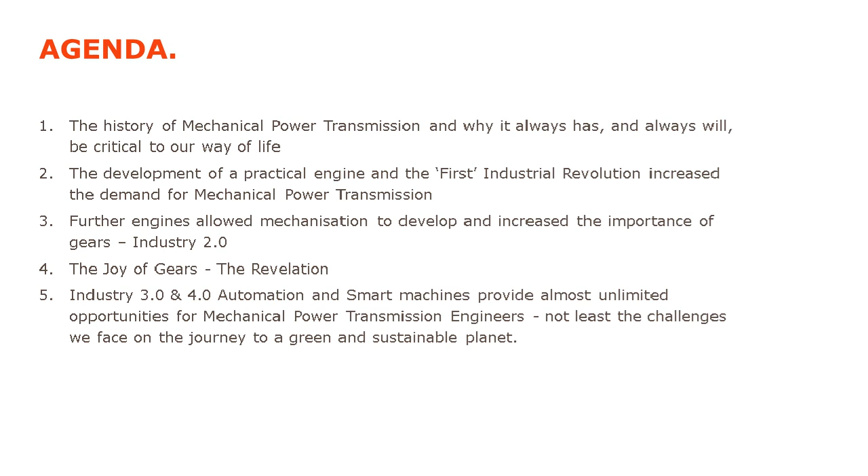And if you thought the challenges we've had over the last couple of 100 years were a lot, that's nothing to what we've got to do over the next few years. So, let's go on a little bit.

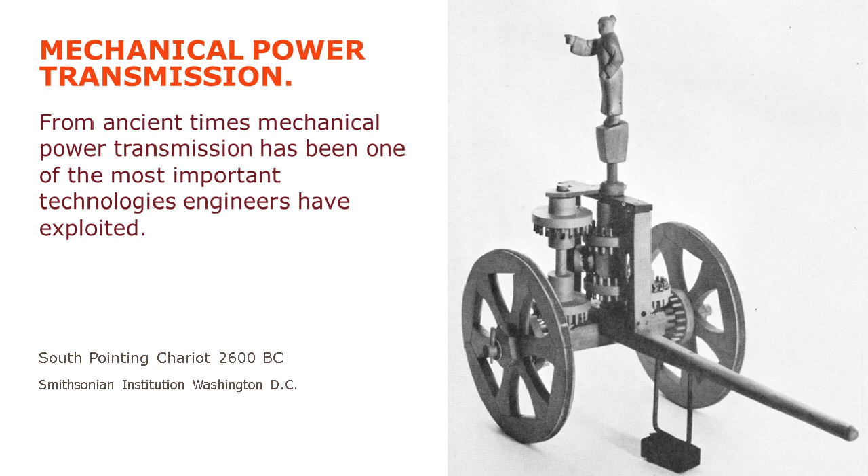From ancient times, I've dug in the history books, and we go down over 4,500 years ago, and we can see this south-pointing chariot, and in there you can see a selection of gears. There's actually a differential gearbox in there, developed in ancient China. And just to prove the point, we've been using mechanical power transmission for thousands of years, and it's been critical to what we do. Even if all you wanted to do is not get lost in the desert, and make sure you knew where north and south was.

Moving on, just over 2,000 years now, we have this navigation device. This is the Antikythera mechanism. It was a navigation device using a series of over 30 gears and plates to calculate lunar and solar calendars based on the movements of the sun and the moon, so you can navigate. This was about 82 BC, and it was salvaged from a ship that sank 65 BC. This is what people have been doing throughout history.

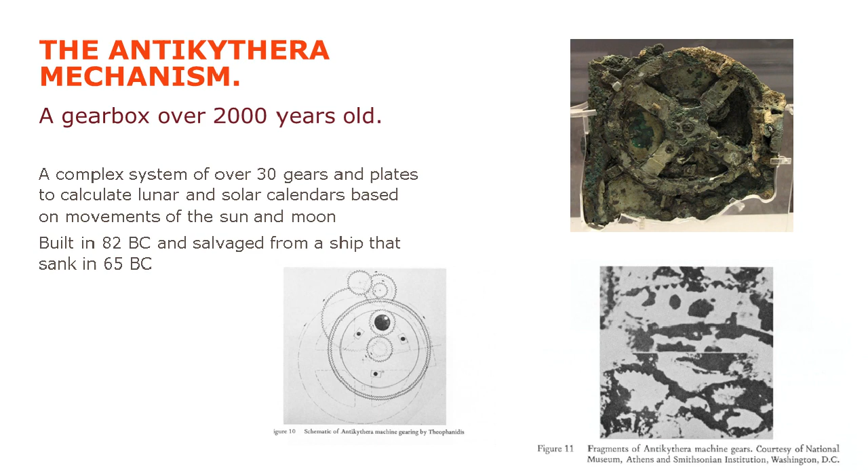Now, that is mechanical power transmission. It's more to do with motion control than really sending power, but it's just to show the point. Engineers and people have been using these almost as long as we've been civilized. However, what I want to look at now is machines where we're talking about transmitting power. So let's think about, first of all, machines powered by people.

This is the ancient Egyptian shaduf, a water lifting device. The prime mover is a man, and the driven machine is this water lifting bucket. The man is using mechanical power transmission to give mechanical advantage. The lever gives him the mechanical advantage, and it's also storing energy in that rock. As he pushes the bucket down into the water, he's storing energy as potential energy in the rock, and so when the water comes up, it lifts it up.

We say this is the Egyptian one because the Egyptians kept record of these things. I'm sure other civilizations were doing this too. But that is one of the machines where we're using mechanical power transmission. The motion, however, is discontinuous.

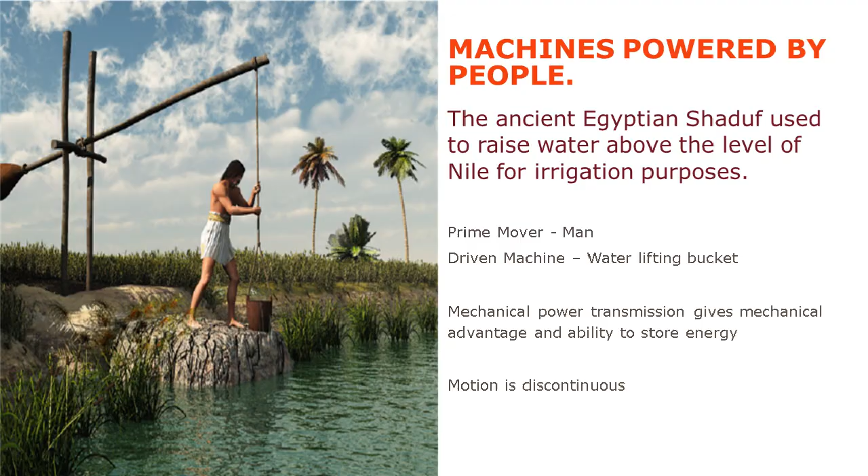So if we go to the next slide, we can look at machines powered by animals. This is quite ancient - a camel-driven Persian water wheel. It's a representation from history books, but I want to point out a few things. First, we have the driven machine at the back, which are water lifting buckets, and those are going at their ideal speed - not too fast so the water spills, but slow enough so as the buckets go through the water, they can be filled. It's going around with its center of axis horizontal, so the buckets go up and down.

But the driving machine, the prime mover, is a camel. It probably doesn't appreciate this, but it's also at its ideal conditions - walking round on a horizontal surface, going at a speed which isn't too strenuous, so its master can make it work all day, going horizontally around at the speed we want. And that mechanical power transmission is doing a few things: it's changing the direction of rotation, so instead of a vertical axis, it goes to a horizontal axis, which is what we want. Also, by those pegs and crude cogs, those primitive gears, it's giving the speed ratio we want.

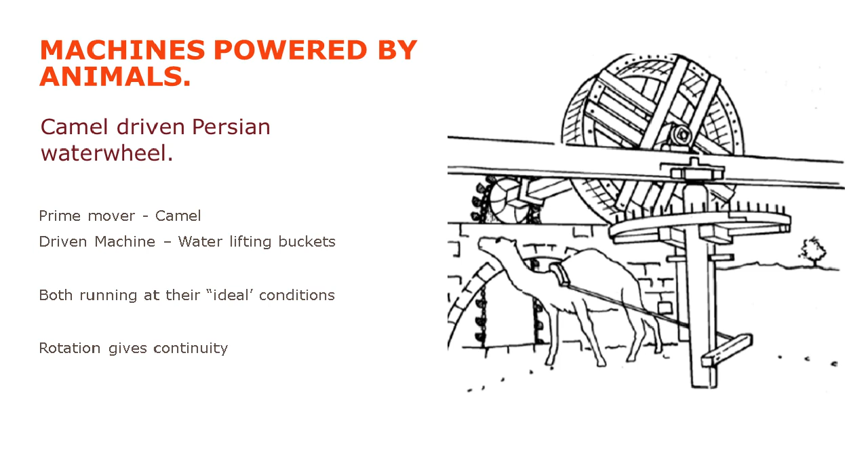And so that's a key thing we see as we go through history - mechanical power transmission and gears are letting things run at their ideal conditions. And one thing we take for granted: rotation gives continuity. Because we've got rotation, unlike the water lifting buckets going up and down, we get continuous motion, which is an advantage we often take for granted.

So not only did we use animals and people to do it, we used natural resources, what we call renewable energy now. So we had machines powered by wind, and in this case the prime mover is the blades going around, and the driven machine, which in this case is a windmill, is grinding wheels. Again, we're letting the prime mover blade run at its ideal conditions.

Inside that windmill tower, we've got a series of very crude gears which have been updated by that Preservation Society in West Sussex. But it's a series of gears transmitting power to allow the blade to go around at their speed, and we can turn the motion through 90 degrees so we can get the grinding wheels going at those speeds.

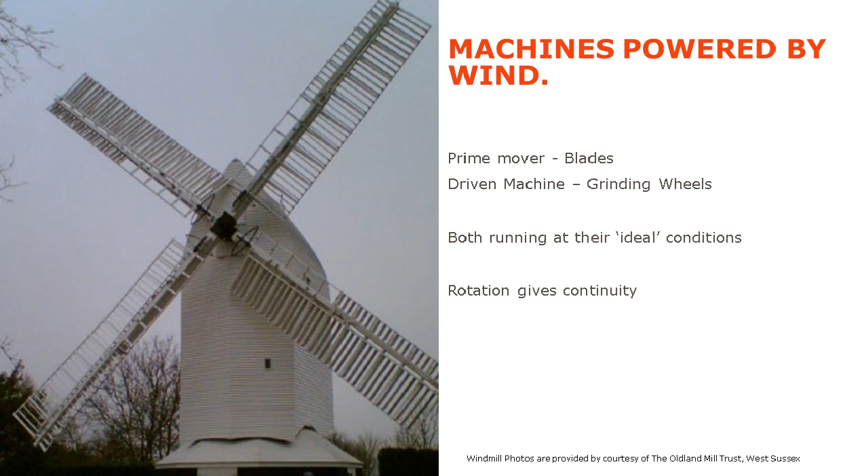In that case, we're grinding corn or grain, but we also use wind machines, I wouldn't say windmills, to raise water and move water out of areas. So again, we're getting useful machines, and the power transmission is letting things run at their ideal conditions.

We have machines powered by water, and again, we could have grain mills, water pumps, and here you can see water wheels where the water can come in at the bottom, the middle, or the top. It's the same message: the power transmission is letting things run at their ideal conditions and positions. If your mill pond is above you or the river's below you, we can play about with it so we can drive these machines ideally. So this is a quick history lesson.

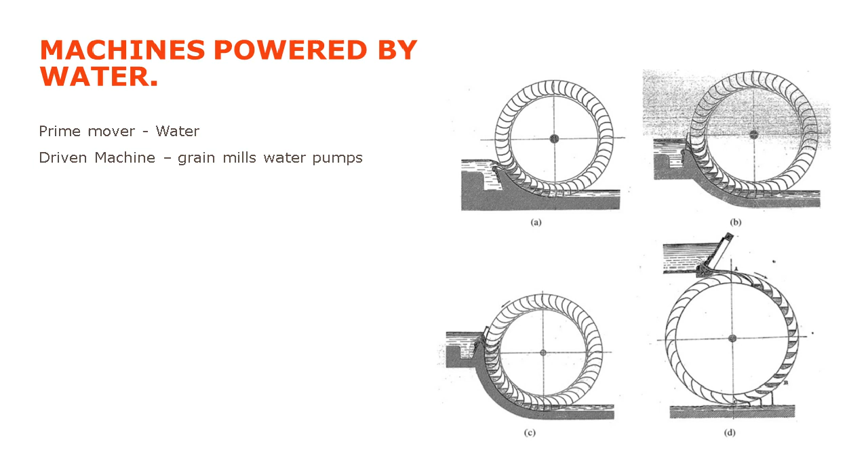However, one thing's important there: you had to wait for the wind to blow, or put your machines near where the rivers were, where you could make a mill pond or drive it. And that's not ideal. So man's always inventive, and so we make an engine. Now an engine, by definition, is just a machine used to convert some sort of energy into mechanical energy that can be used to perform useful work.

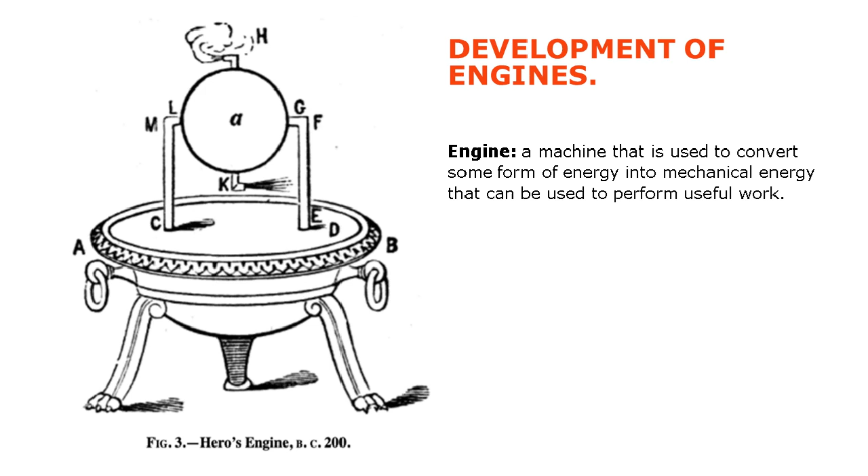But it wasn't until the late 18th century that we had the steam engine. This was the first practical industrial engine. This was developed, and this is a large engine. I'm using James Watt's steam engine here because James Watt was the man who coined the phrase, if you like. When we had the first practical industrial engine, we had to create a new word, and that was horsepower.

We needed a unit of measurement to rate the power of the machine we got, and it was adopted by James Watt to compare the output of his steam engines with the power of draft horses. It was later expanded to explain the power of all other sorts of engines, electric motors, steam turbines, internal combustion engines. There's a certain irony here because we've replaced the term horsepower with the word watt and kilowatts. So the man who invented horsepower, his word has been replaced by his own name, watt, kilowatts, watts, and sometimes megawatts, as we'll see later.

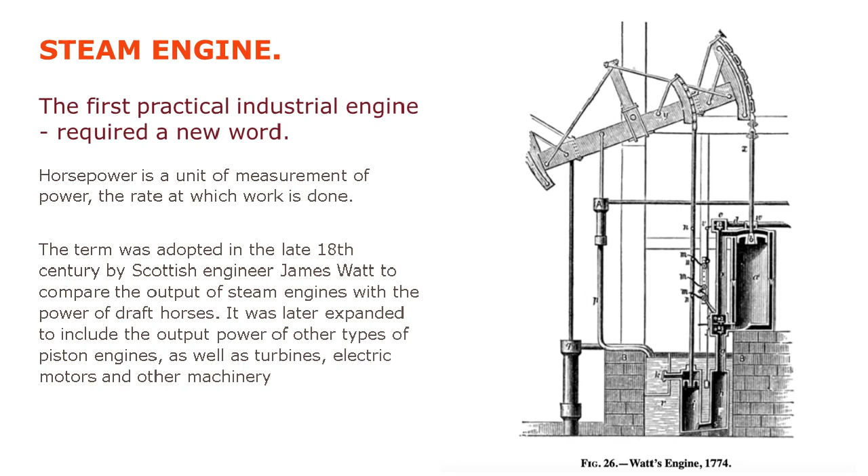So this heralded the Industrial Revolution, Industry 1, and let me emphasize this: that meant we had single machines for many users. We don't have time to go into how steam engines work, but it's a piston that goes up and down, and you can see here the lever. The first serious application was pumping engines.

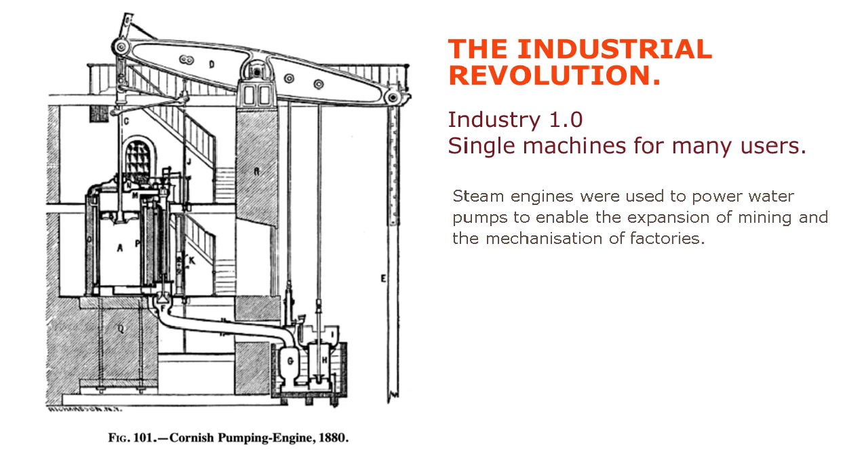In Cornwall, where they made the most initial developments of steam engines, they were used to get water out of the tin mines. The tin mines had gone under the sea to collect as much tin as they could, but they were limited by the mines flooding. So we used these engines to pump the water away so we could carry on mining. We call it Industry 1 because it was single machines for many users, so you had one big machine and so many people could work.

And this gave us the mechanization of factories.

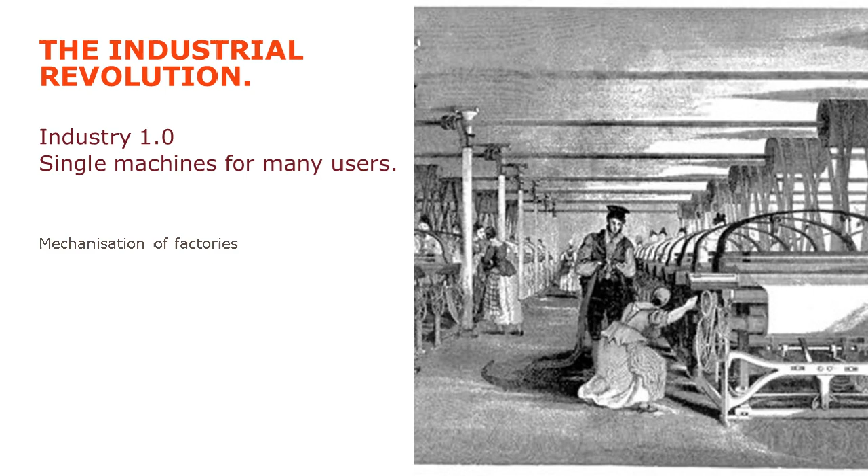So here we are, and you can see here mechanical power transmission. I haven't shown so many gears here, but it is mechanical power transmission. It's letting the prime mover run at its ideal conditions, and those individual little machines all running at their ideal conditions too. So we get mechanization of factories, and that's what's happening.

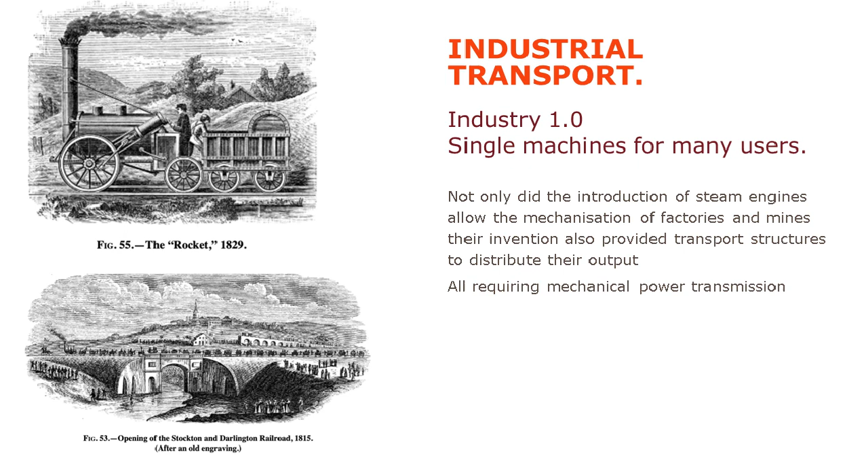It was a massive change, Industry 1, single machines for many users, and it did start to transform our way of life. Whether that was good or bad, it certainly transformed it. If we think about those cotton factories, instead of people working out in the field, they were drawn into the towns so they could work in factories. It may not have been ideal, but it was a much more reliable source of income than what they were getting before. This whole way of life, which changed towards the end of the 18th century, exploited and used mechanical power transmission to get there.

And this really did change things. So we had the smaller prime movers, meaning we could have many machines for many users. Everybody was getting them, factories were using them, things were going on like that. And again, every one of those prime movers pretty much needed mechanical power transmission, gears and gearboxes.

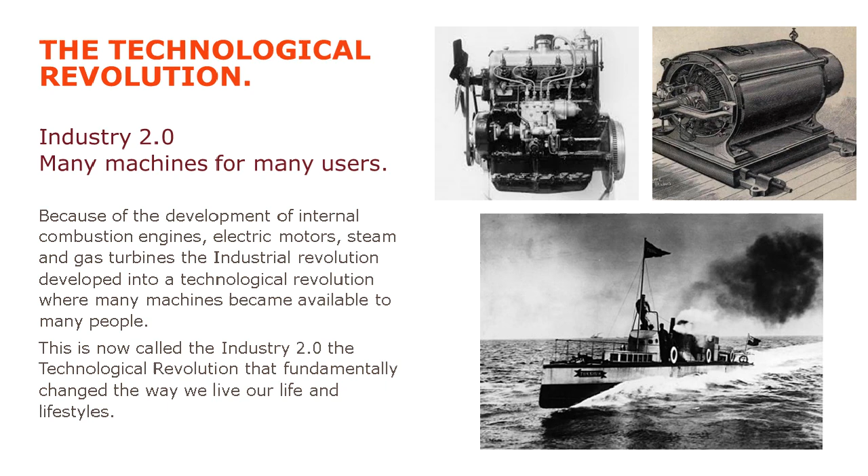This technological revolution led to what we call mass production, towards the start of the 20th century. I make no excuses — I know Mr. Ford didn't invent the car or the internal combustion engine or the first car. But the point is, here we had mass production.

He introduced the Model T, and then he introduced integrated moving assembly lines for auto production. So not only did his products use many machines for many users, we were using machines to produce them. A few things we often don't understand: what Henry Ford did not only produced cars so rapidly and reduced the actual cost of the product, but it also gave a step change to the wages of production workers, enabling them to buy not just motor cars, but the resulting products more broadly.

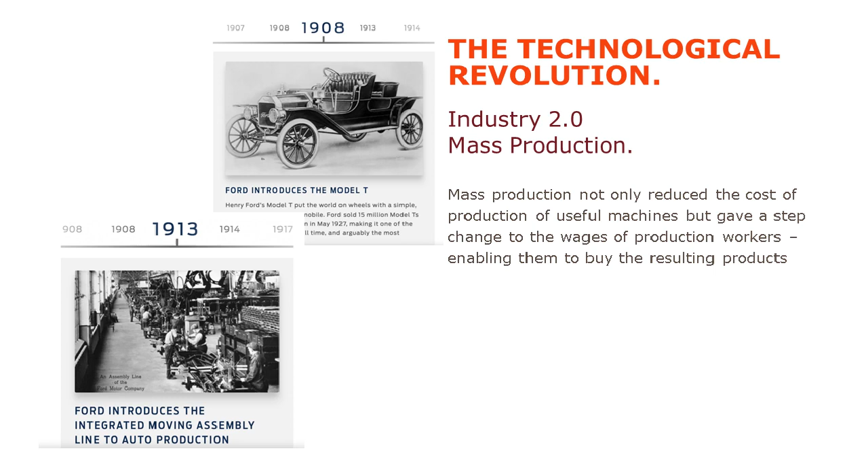This mass production changed the way of life again, because you would never have believed that by the end of the 20th century, within 50 years, almost everybody could have their own personal transport or whatever. All these things in our way of life came about, and each of these machines we were using was demanding mechanical power transmission.

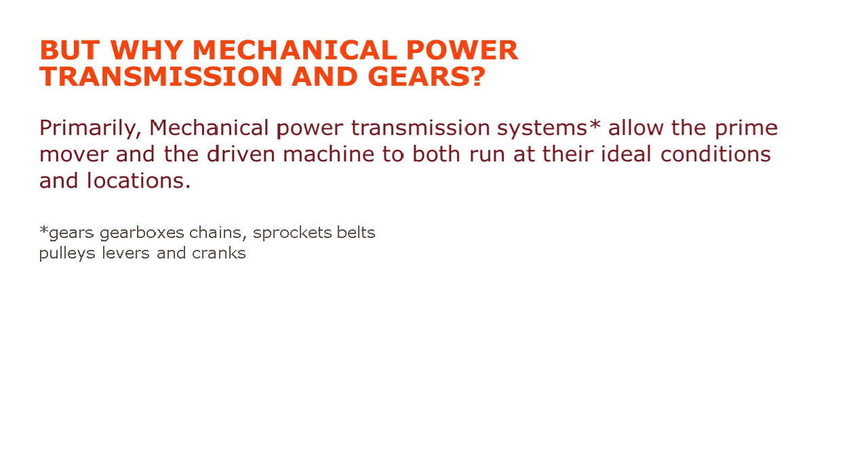But why mechanical power transmission and gears? Well, primarily, mechanical power transmission systems allow the prime movers and driven machines to both run at their ideal conditions and location. When I talk about mechanical power transmission, I talk about gears, gearboxes, chains, sprockets, belts, pulleys, levers, and cranks. All these things we've seen in those examples, allowing these things to work ideally at their conditions. So that's why we use mechanical power transmission.

But what about gears? Well, there's a few things about gears which separate them. There's a table here of all those different things I mentioned. That actual table is from one of the BGA teaching packs. We can talk about that much more if you attend the Gears and Gearbox course that's coming up.

But we can see there we have spur helical gears, bevel gears, worm gears, and all those things going there, flat belts, V-belts. And the thing is that whilst gears aren't the fastest of mechanical power transmission, that accolade goes to flat belts, which you can run at 150,000 revs per minute. But equally, we can run spur helical gears up to 100,000 revs per minute, and that is an incredibly fast machine, if you've ever seen a machine that runs anywhere near those speeds.

But look at the power density you can get from gears. It's incredibly high. And then the efficiencies, again, it's incredibly good, 96, 99 percent. That's not untypical. Even worm gears, which over the latest years we're getting to be a lot more efficient than they ever were, are incredibly efficient ways of doing these things.

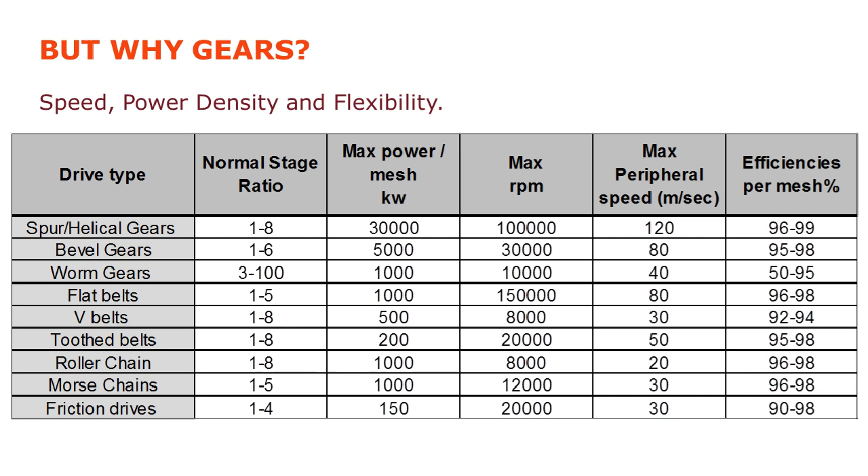So all those things exist, but gears give you not only the high speeds and power density, but one thing we often take for granted is flexibility. While spur and helical gears run on parallel axes, and belts, V-belts, tooth belts, and roller chains all have to have parallel axes, that's not so with gears.

If we look at the next slide, we can see crossed axis gears, worm gears, bevel, spiral bevel gears, and even hypoid gears. The truth is we can change the axis of power any which way we want. Even that camel-driven pump was doing this over 2,000 years ago. But we can change that.

And this allowed those small prime movers to get the ideal mechanical power transmission and develop all these things we're looking for.

Before I go on, I just want to talk about horsepower. We take these things for granted. So this is a 1 horsepower machine. Absolutely, we understand that. But that was never enough to do the things we wanted to do.

So here we can see a 30 horsepower machine. And I'm not convinced every one of those 30 horses is pulling their weight or doing all those things there. But these were developed in the 19th century, so we could feed the growing number of people. That's a 30 horsepower machine, from the USA, where they had these very large machines and very large prairies of wheat where they could use it.

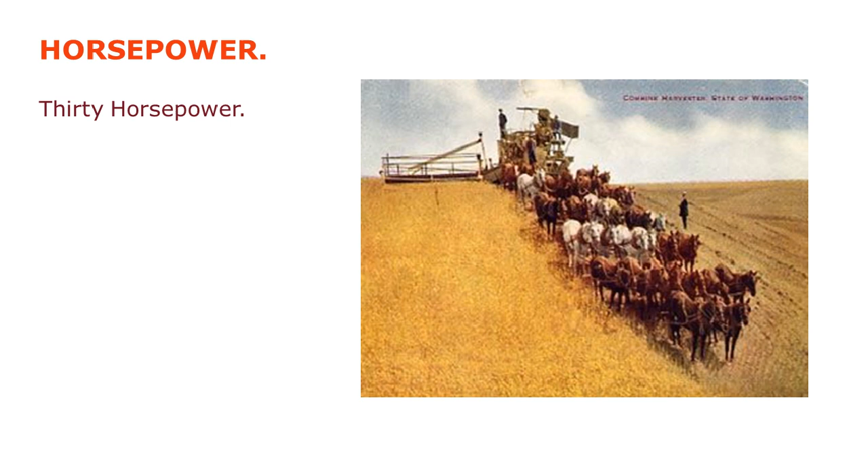Then it has a gearbox in there, which gives you different ratios. Then it has a differential gearbox. Not only is that changing the axis of power through 90 degrees, it's also allowing those driven wheels to go at different speed when the vehicle goes around a corner. In addition to that, we have gears and gearboxes in there, allowing power takeoffs to drive things.

So whether you like it or not, that tractor is doing all of the work those 30 horses can do, probably more efficiently in the transfer of energy into the work done, and one man can do it. One man can drive that tractor and do what was being done there by 30 horses. And you can see just by thinking about that, what a massive change in how we manage to feed people.

And there's a concept here, which I'm not sure if the figures are absolutely right, but the concept is that at the beginning of the 20th century, we had 1 billion people on the planet, and at the end of it we had 5 billion people, and we were farming perhaps not as much land, because 5 billion people take up a lot of land.

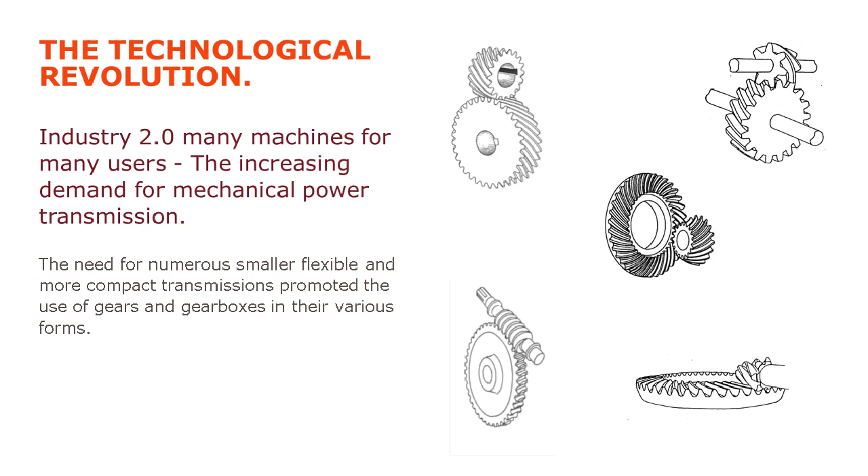So we'll look at personal transport. And again, I'll go through these - there's a lot of slides to get through. But we look at personal transport - everybody has access to some sort of car. So look at that sports car there.

Just let me explain, take that what I've just started a little further. There's an internal combustion engine there, and again, that's an Aston Martin car - not particularly a David Brown one. But that has a 300 horsepower engine in there. And that's quite staggering. The problem with that, it develops its power at 9,000 RPM, which is much too fast to drive those wheels. If you drove those wheels at 9,000 RPM and exploited the 300 horsepower, that car would have to go 400 miles an hour. And then even an Aston Martin doesn't go that fast.

So the point is this: what you need to do is reduce that speed to something useful, and that's indeed what you do with a gearbox. And I mentioned before, in order to go around a corner, those driven wheels at the back need to go at different speeds and still deliver torque. So you use a differential gearbox in there. And we actually saw one on that south pointing chariot, but this was developed with cars to allow you to do those things. So you can exploit the power of that internal combustion engine and drive that car at fast speeds.

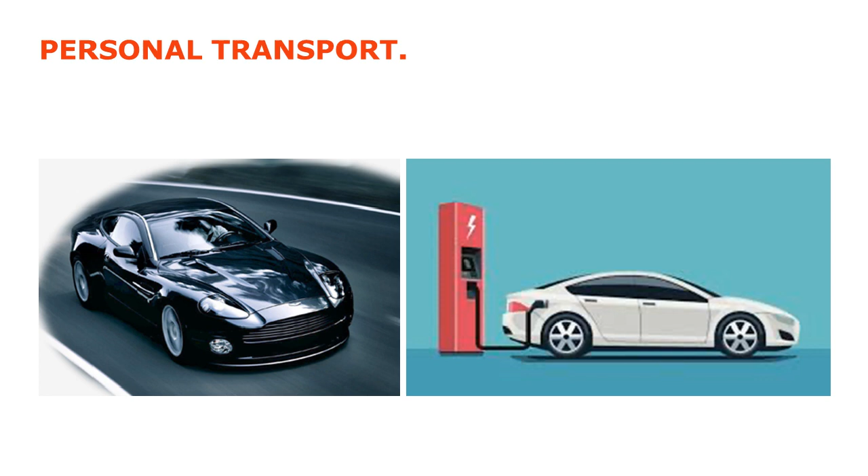You do not need, because of its torque characteristics, to keep changing the ratio all the time, but you do need to have that gearbox to run it there. But I have to say, talking to experts in the industry, the next generation of electric cars are indeed having a multiple ratio gearbox in there, even if it's only 2 ratios, just to make them more efficient and able. And we go through all these little things here. I won't labour too long on this, but every part of our life today is driven by machines, gears and gearboxes.

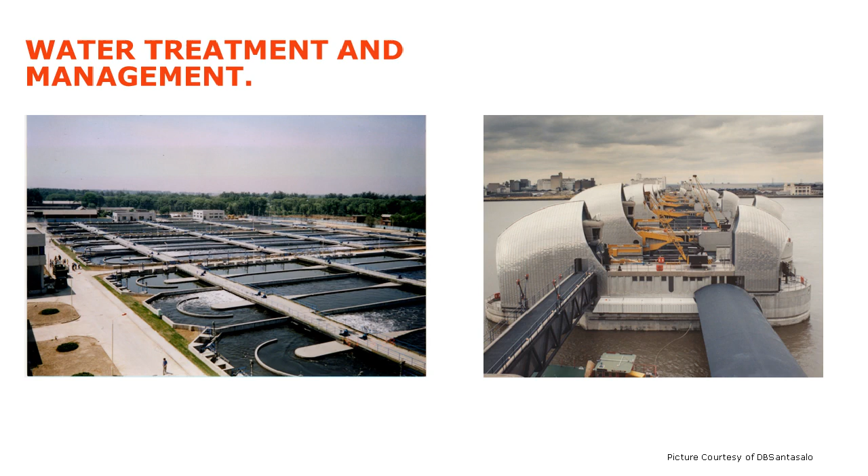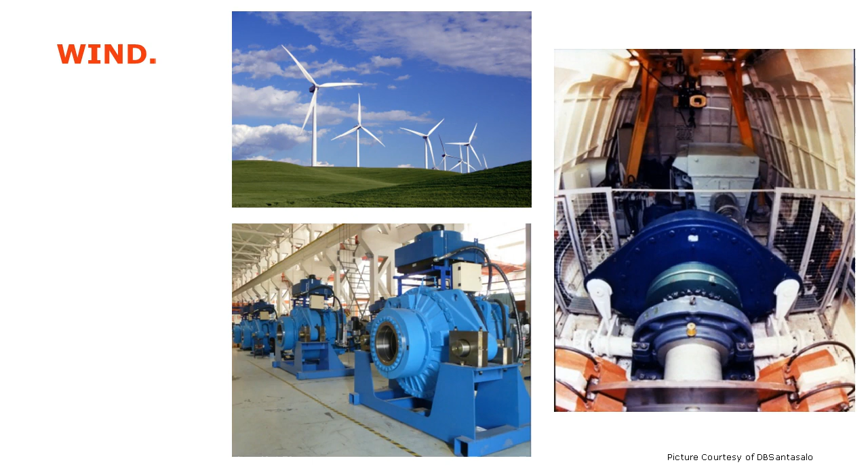We're transporting goods there, water treatment and management, all of those things, whether the Thames barrier or whether it's water treatment plants, there's machines in there doing it. Steelworks, all these activities require gears and gearboxes. Wind power, we'll talk about that in a few minutes. Wind generation, over 90% of the wind turbines you see have a gearbox in there, allowing that alternator to run ideally and the blades to sweep at the right speed.

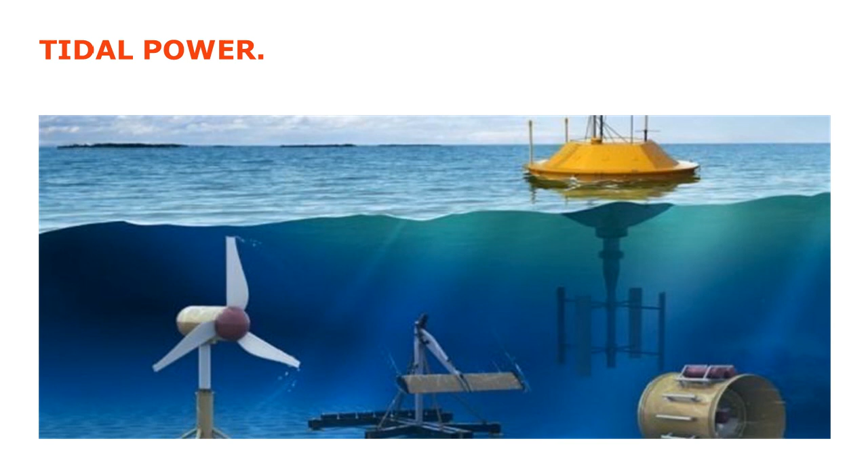Obviously, go into tidal power. Those are machines which are being developed, and each of those will have mechanical power transmission and gears. So we're using them all the time.

So now I come to the revelation, and this is where we are. The inescapable truth, and this is from somebody who actually has spent his whole career on gears, is that they're used not because anybody wants them, but because we need them. The thing I spent my life on, nobody really wants them. They're only there because we need them. And there is a secret joy there. I'll explain that in a second.

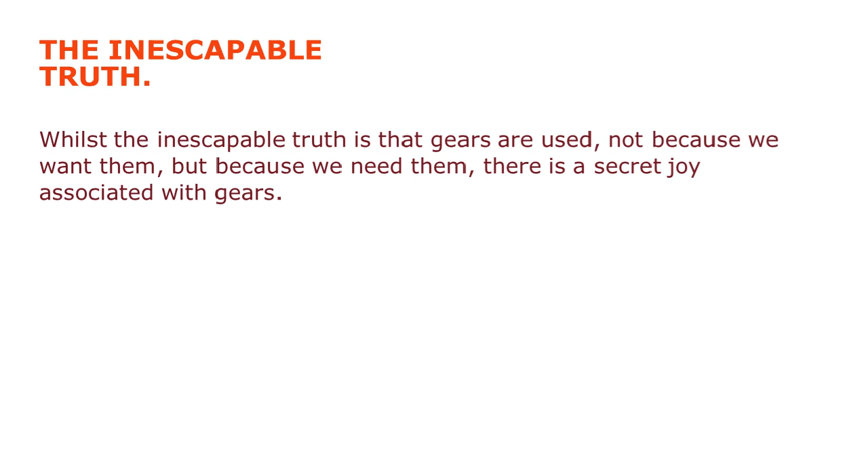But what I'm saying here is that actually if I had a gearbox, it's no use on its own. It does nothing. It needs a prime mover. It needs a driven machine. And that is a secret joy. And that is what it's.

This is the revelation. To fully understand and appreciate gears, one of the simplest, oldest, and perhaps most elegant and precise of all mechanical components, it is necessary to grasp a vast range of engineering topics. And that is where I found the joy, and what I believe the joy is. Because they embrace so many technologies, there's always an opportunity to learn something new. That's what I've been doing for 50 years, and it's inevitable that once involved, you will meet and enjoy working with many different and helpful engineering experts.

So now, what I want to do is go through where that joy is. So we'll quickly go through these things. First of all, you need to understand the machines we use. These are the most simple ones. So for every machine we use, every driven machine, we'll find there's a torque speed curve. And so the one on the top right there, everybody knows it's a fan curve. So the torque on a fan varies with the square of speed.

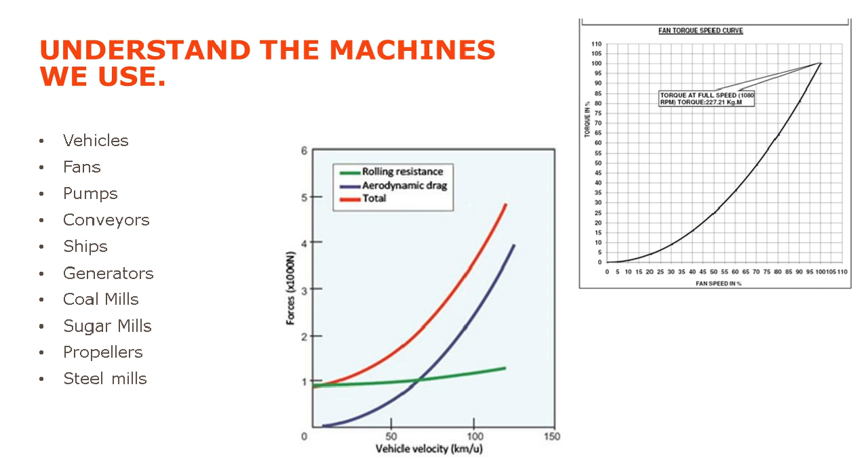On the left there, we have a vehicle. And so what we have is a rolling resistance, a green line. And then you have aerodynamic drag, which goes up pretty much exponentially, or with the square of speed. And so the red line is what you need to drive a car or a vehicle to go faster and faster. If you're going to be involved with gears, you need to start understanding all these things here.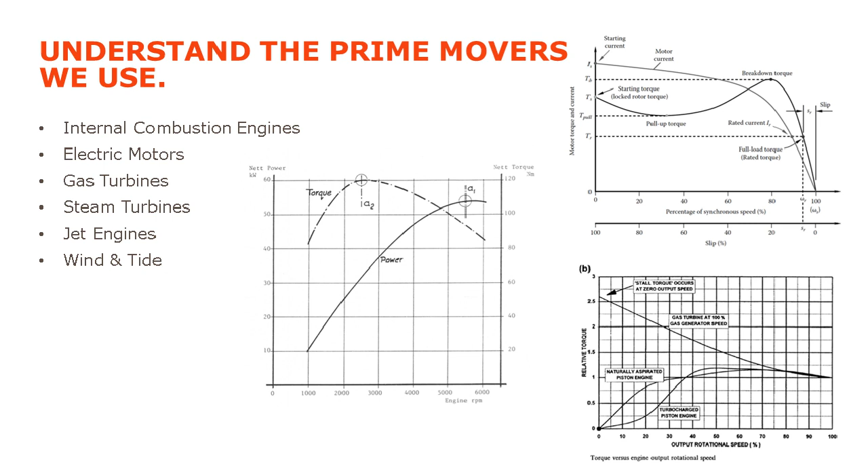So, let me go back again, sorry. We need to understand the system design.

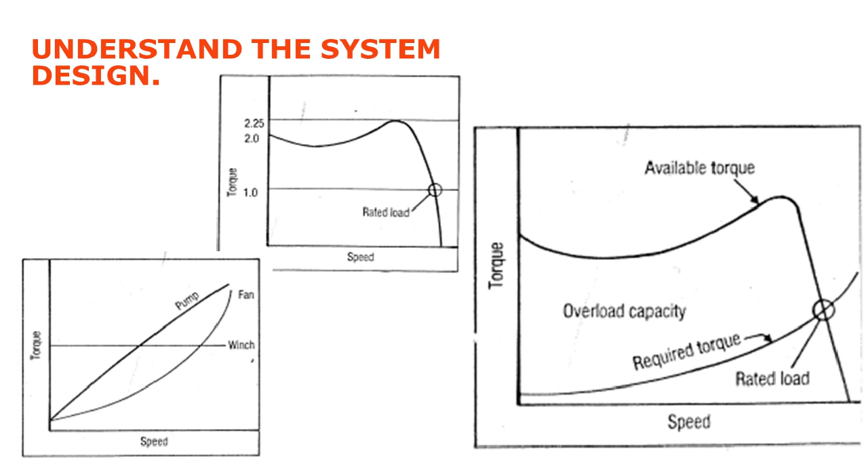Somebody has to put these systems together and understand this. What I mean is that, yes, you could put a fluid coupling in there. You can buy a very smart motor, and you can put in some limited slip clutches, or whatever. You get some smart motors to control that. But somebody has to make that decision. Somebody has to understand the system design and put all the things together.

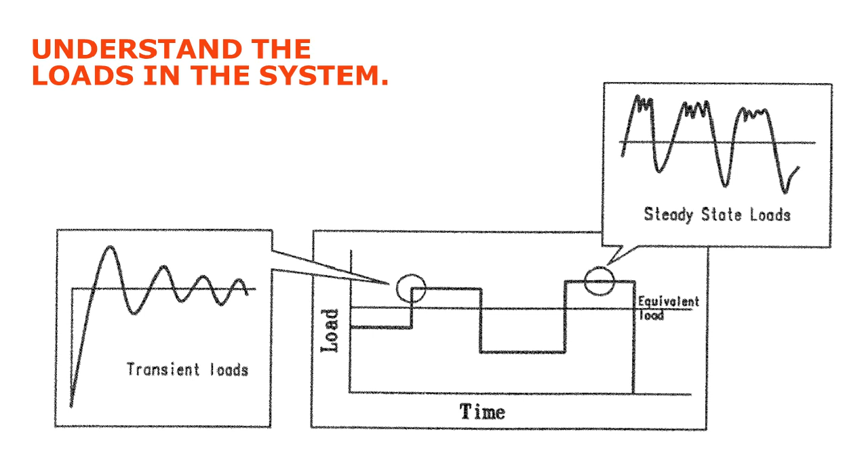So we've done all those things, but then I need to understand a bit better the loads in the system, and that's what I've got here - a diagram showing the loads going up and down. As you know, loads are never steady, and when you go from one state to another, you get transient loads, and you need to understand those. Every system, the load is never steady. You need to understand these things if you're going to have a successful system with a gearbox.

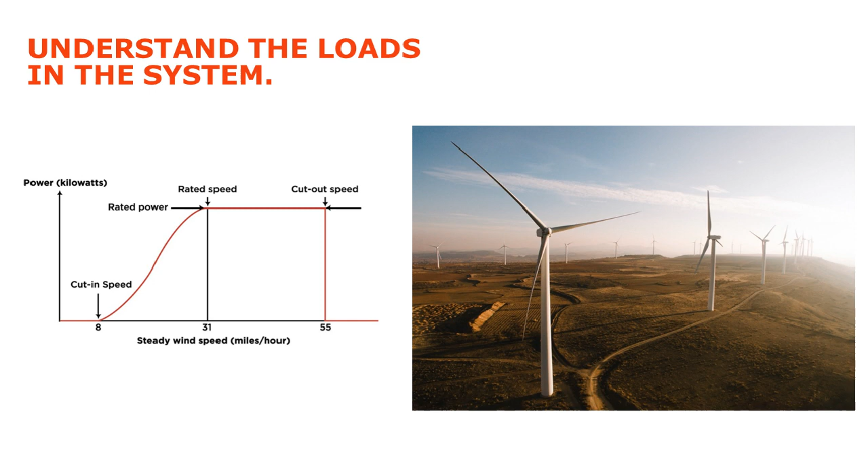Blades were falling off wind turbines. It is one of the most arduous applications people had come across, and nobody expected it. We had massive amounts of failures, both for wind turbines and all of the transmission systems were suffering loads nobody understood. So what we had to do is go and understand it.

Yes, you've all done this at college - you write the equations of motion, and you solve these differential equations of motion, and you can predict what the loads are. So all that time you spent in maths learning about Laplace transforms, yes, it's really useful - you need to understand the system. I was very lucky, one of our engineers, Ian Pate, could remember how to do these things, and Ian managed to do this, and we quite suddenly found out there were a lot of things going on in that system.

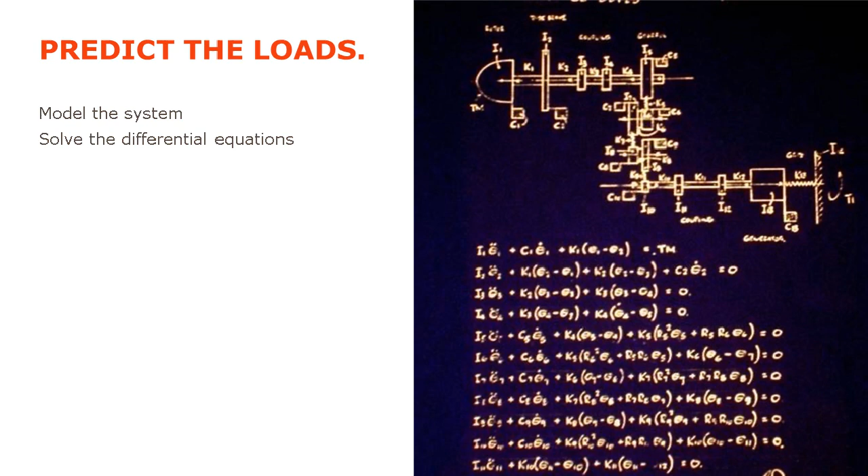What was happening is we were getting typically up to 450, 500 kilowatts going through the system. The biggest shock in the system was there as you brought it up to speed.

Yes, this is Altamont Pass in California, 60 hertz. That's the national grid in America, and the machine's running at 60 hertz. However, if you weren't absolutely in phase with the grid, you'd be a couple of milliseconds late, because of the stiffness of that last part of the diagram. It would grab you, and whatever loads were necessary, it would bring you into phase.

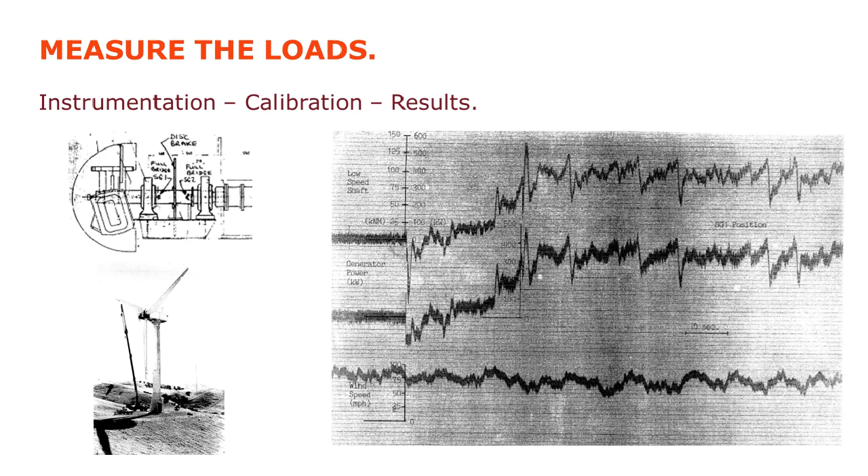That's what people learned, and that's what caused a lot of failure. So understanding the system, sometimes you need problems to fully understand these things. But over the years with wind turbines, we've learned a lot. It's been 40 years since that started happening, and now things are pretty reliable, though it's still a very arduous application.

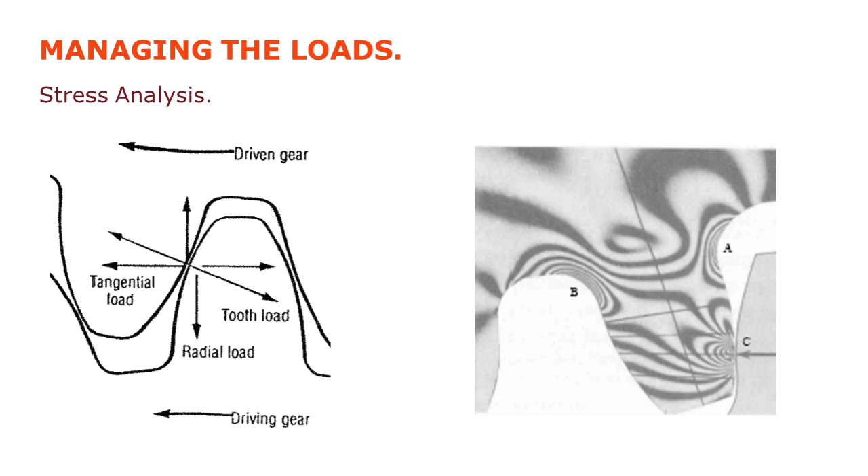Once you know the loads, you've got to manage them. Looking at the gear teeth, we can see the Hertzian stresses there, we can see the bending stresses, and we need to do the stress analysis.

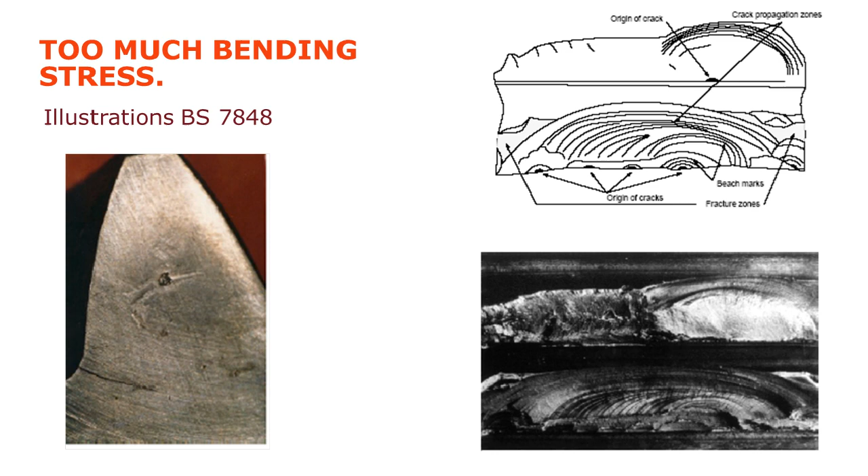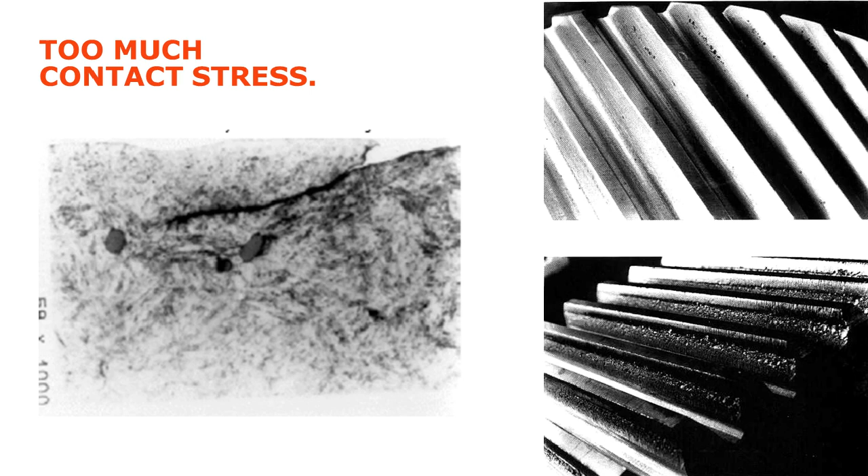All this metallurgy you've learned, you can look at all these things, and all those illustrations are from the British Standard on identifying failures. We can see pictures of bending and whatever. Too much contact stress, the Hertzian stresses come at the root of the teeth, just below the surface. The cracks propagate from just below the surface, so we get surface pits.

We need to calculate, we need to embrace the standards and calculate the load capacity of spur and helical gears, and that's what people are doing all of the time. Today you have little or no discretion. You need to follow the standards to make sure you get certification for the products you use, and these have been developed over the years.

This is where engineers have to come make the decision. The basic principle in all of these gear rating standards is to start at the top, where you work at a nominal tooth root stress, sigma F naught. The detail of this we can go into in the gears and gearbox course, but the concept I want you to understand here is you don't just sit at your desk and say, that's the nominal root stress, that's what it's going to feel.

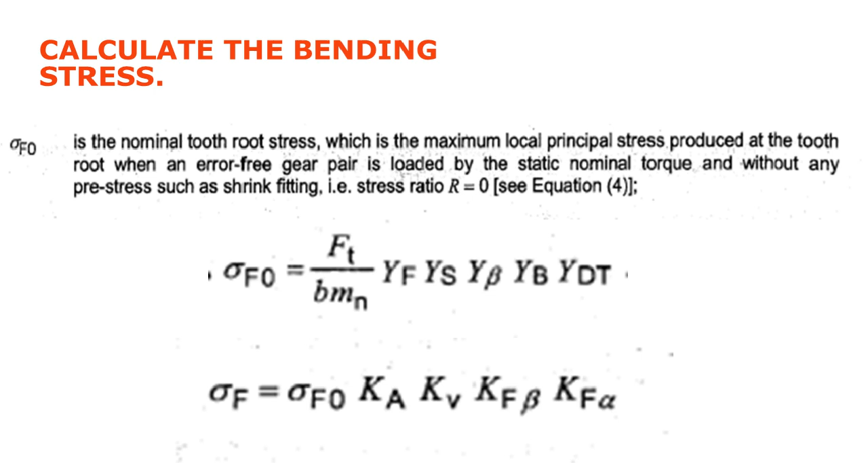You have to make a decision on how it's going to be manufactured, how it's going to be installed, and how it's going to be maintained. You need to go and discuss with your manufacturing people what accuracy they can get. You need to know what application factors are there. So the engineer isn't just sitting there giving a theoretical thing. He needs to go and understand, and then he will modify that nominal stress to give you the actual stresses, taking account of the accuracy of manufacture, the application factors like we saw in that wind turbine. Then you make an engineering decision to say, that's my theoretical thing, that's what I think is pretty certain to happen, so those are the stresses we have to accommodate.

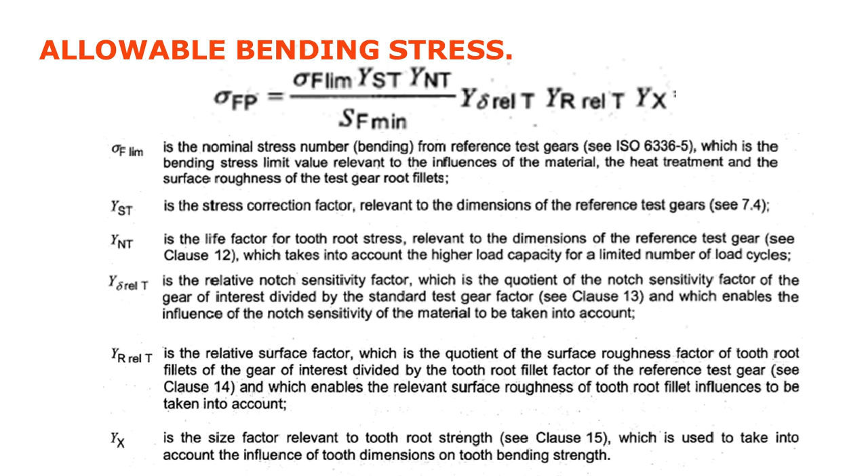So again, I'll go through that. There's allowable bending stress, all of that Goodman diagram, all that fatigue data, because pretty quickly with gears you get up to infinite life, you soon do a million cycles, and so you have to understand all that thing you learned about strength of materials.

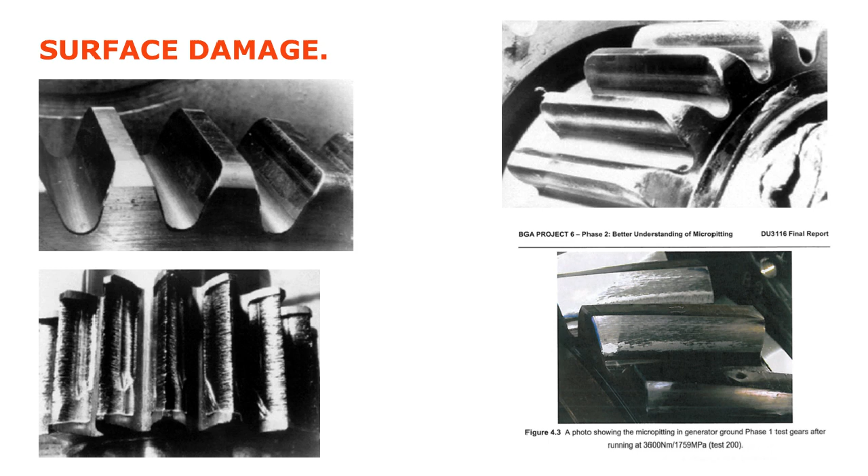And again, you can get surface damage. Gear teeth are always a mixture of rolling and sliding, so you have to depend on lubrication to handle that. And there's more and more standards.

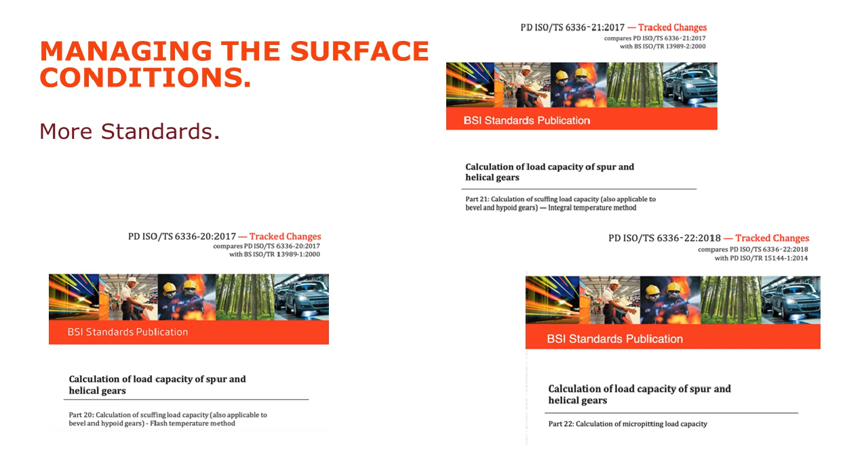I'll make the point about standards. This is ISO 6336, and you can see that we're now up to part 22 - there's 22 sections to that. If you're young and involved, if you're not happy with the standards, please get involved with the UK's standards committees so you can attend ISO meetings and put your two pennies in to say, this is how I think the standard should be, this is how we need to improve things. There's opportunities there to do it.

Tribology and lubrication - we need to separate the surfaces. So you need to understand about hydrodynamic oil films, elastohydrodynamic, mixed film, all these things. You need to understand this. Now we can calculate oil films pretty accurately, and we rely very much on the oil companies to deliver and give us the additives and lubricants which allow us to make gears run at incredibly high speeds and loads that we wouldn't have thought were possible 50, 60 years ago.

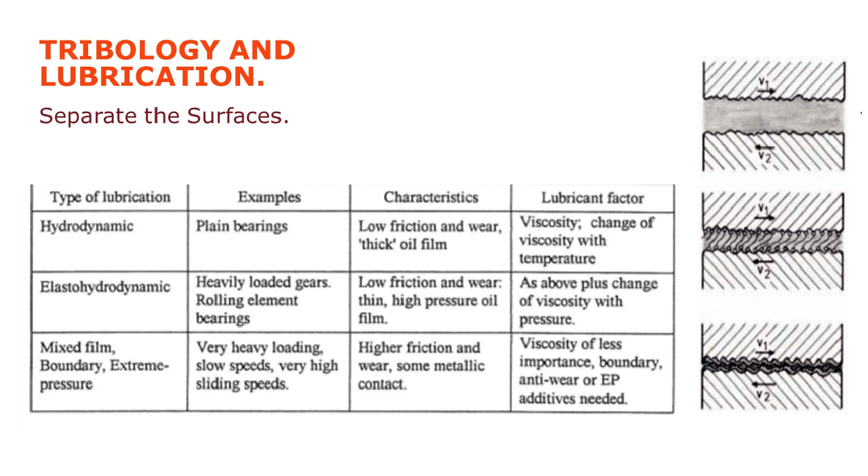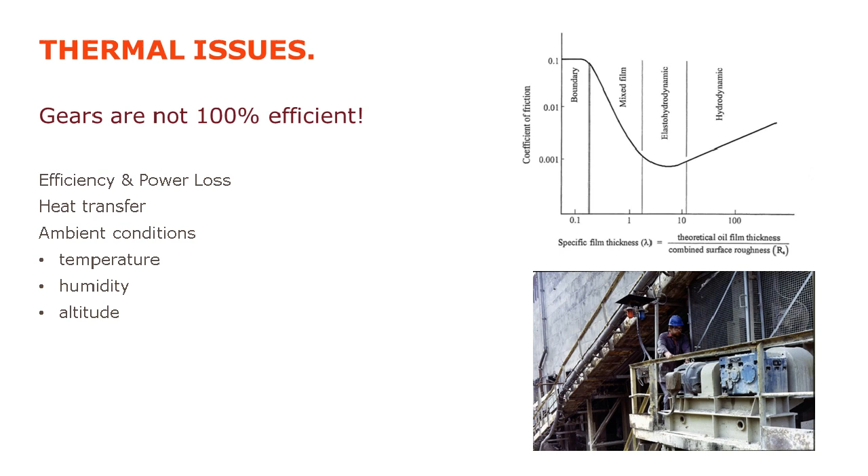Thermal issues are important. There's always a power loss, even though we know there's 99% efficiency in these things. There's still a lot of heat to get rid of, and we need to look at how the coefficient of friction changes with different lubrication, and how we're going to get rid of the heat. Yes, bending moment diagrams, shear deflections are important. We need to know how things change.

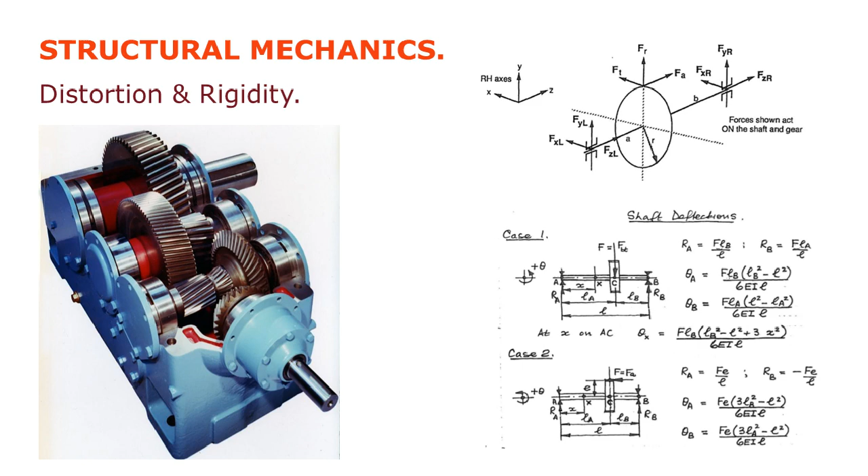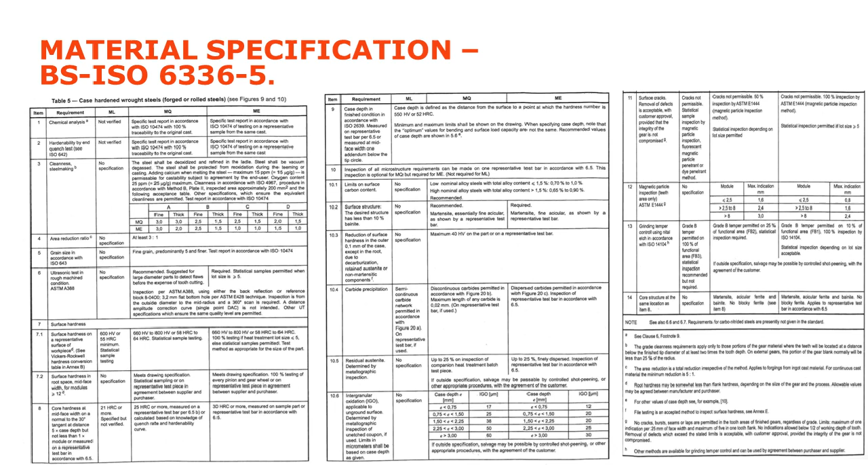Material specifications - we're very lucky. Now the materials we get are incredibly strong, but you need to embrace the metallurgies. This is from 6336. In order to get a gear material which will do what you want it to do, you have to get certification, and there's 14 parameters you have to certify and prove before you can get a piece of material. Luckily, we have some wonderful material suppliers now who can supply material with the appropriate certificates to do this.

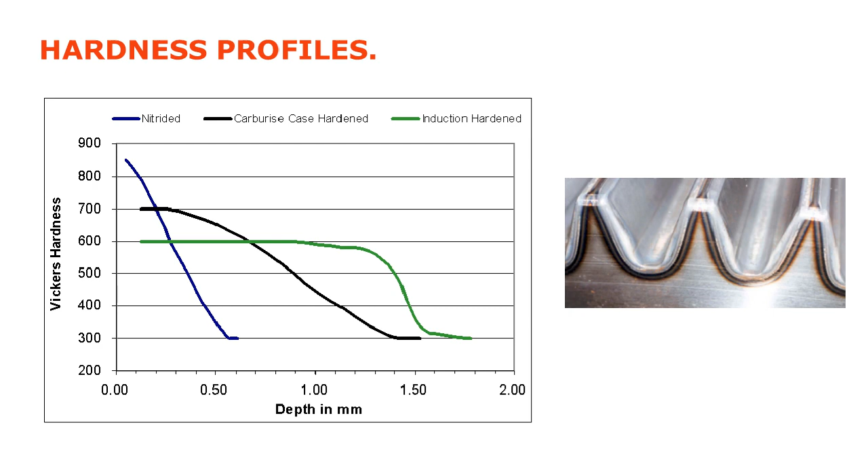You need to harden the gears to get the thing there, so heat treatment is very important. We can nitride gears, we can carburize and case harden, induction harden them, give us the surface hardness we want. Metallurgy is incredibly critical to what we do. Material science - I hate to say this, but metallurgy and treatment are critical to the performance of gears. So those metallurgists you work for - every successful gear company must have successful metallurgists and heat treatment facilities, because we rely entirely on it. All that you learn about material science, once you start visiting a heat treatment plant, you'll fully appreciate metallurgy much more than any classroom will do.

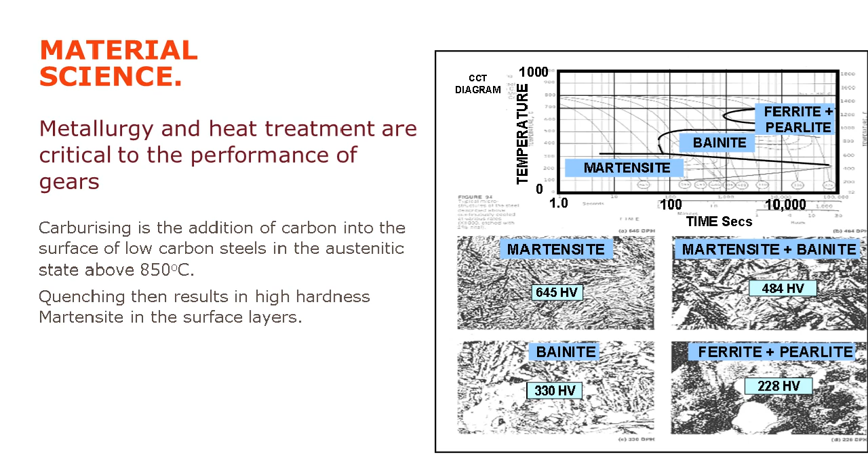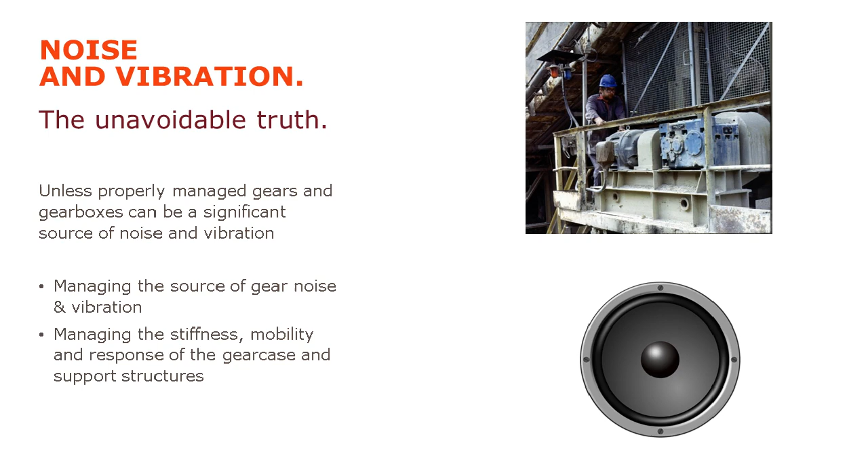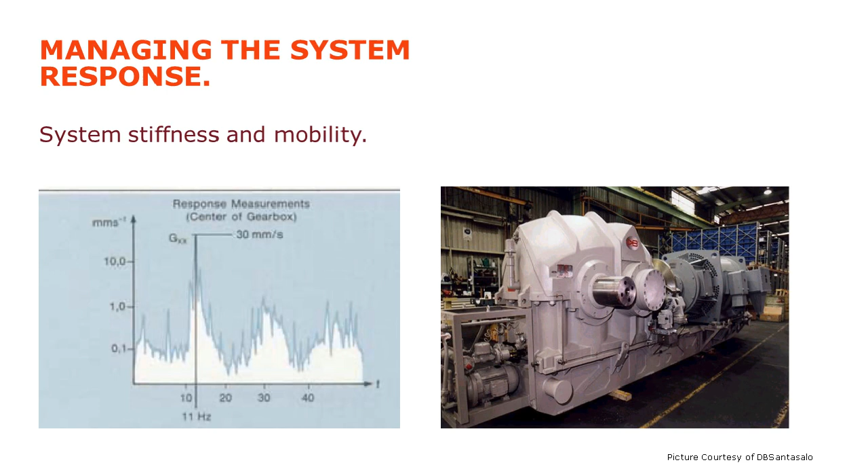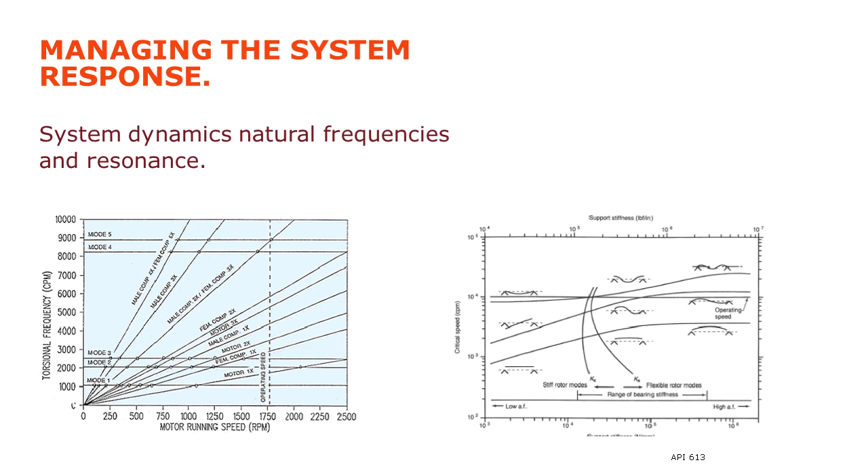I am going through these quite quickly, so we have a little time left for questions.

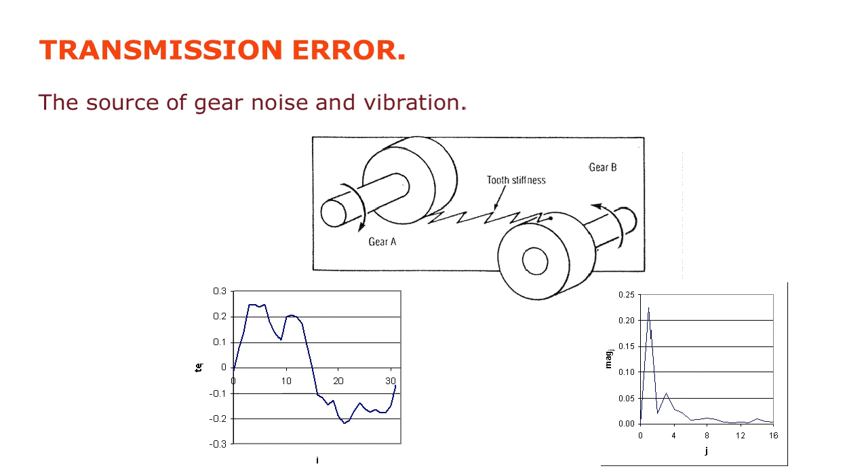Transmission error is a measure of the source of gear noise. We model gears, we put in a tooth stiffness, and transmission error is how much that representative spring connecting two bodies moves during the transmission. If that's zero, you get no noise. But these days, we have to predict how the stiffness changes as different gears go into mesh. That was a massive mathematical challenge for many years, and now we have software which helps. But in order to make silent or very quiet gears, you have to do that calculation and embrace it.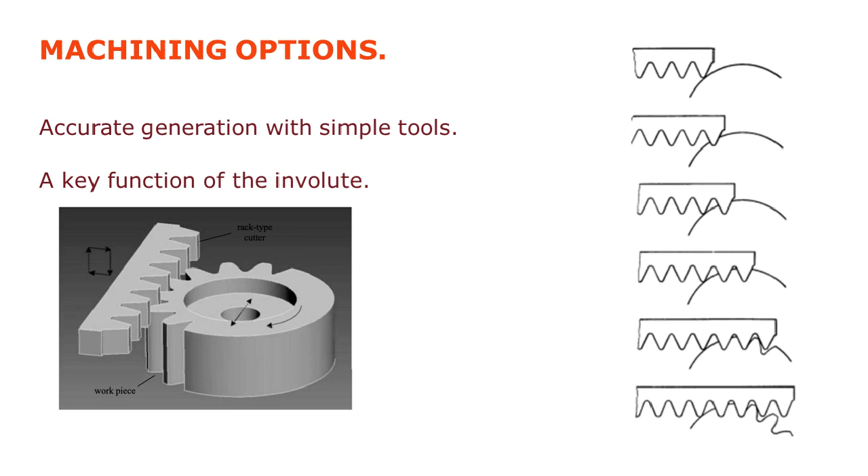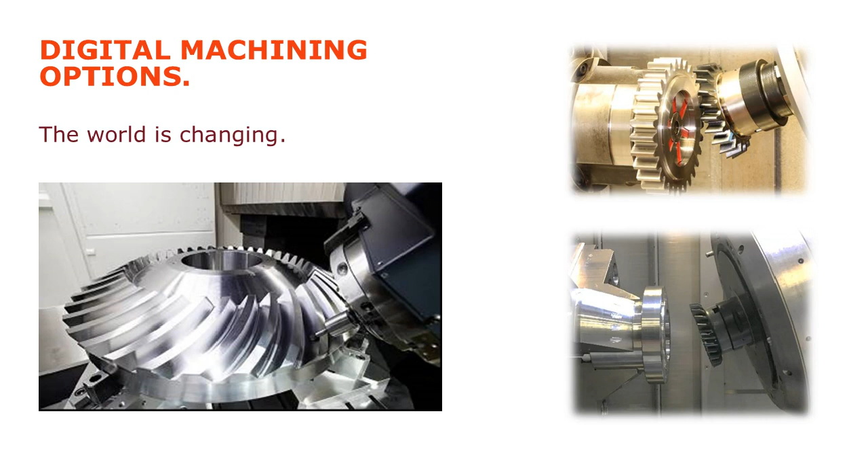That has all changed with the advent of digital machining options. We can now use 5-axis, multi-axis CNC machines, and so the options to machine gears are increasing all the time.

Forming options - this is from AMES, where you can form gears using sintering. You take powders, put these together, make a green thing, then sinter at high temperature and produce very dense gears. It will never be as dense as forged gears, but this is an incredible option. Today people are producing gears with very clever arrangements of powders to dampen noise, still have significant power capacity, and produce gears incredibly cheaply.

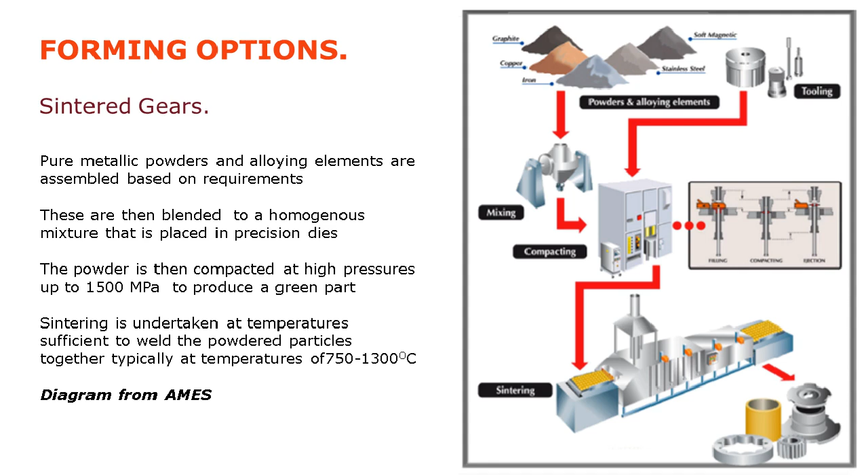Additive manufacturing gets more and more important. The picture there is the first additive manufactured gear the BGA had made, 15 or 20 years ago. I ought to mention I am focusing a lot on metals here at the moment, but actually most gears in the world are made of plastic, and we use similar ways. Let me explain this properly going back a couple of slides.

Looking at these manufacturing options, casting and moulding are the ones used pretty much for mass production, and plastic gears come into casting and moulding. Forming, yes, maybe. Steel gears tend to go in the machining centre on the right there. But if you want to mass produce gears cheaply and quickly, you need to invest heavily in dies and injection moulding - you don't do it for a one-off. So there are differences between plastics and steel manufacturing, but the world is changing.

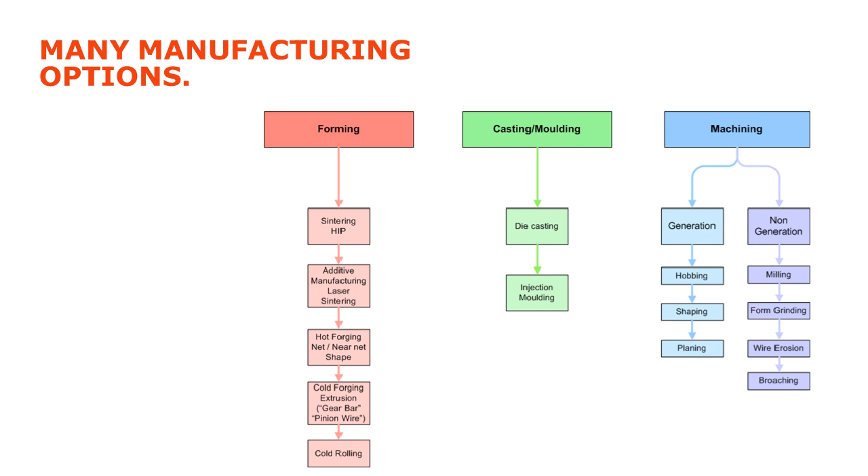Powder metallurgy is giving some very exciting options in forming. As I was saying, 20 years ago we found the first additive manufactured gear. Even as we speak, people are putting together collaborative research projects so we can do pulsator testing on additive manufactured gears. Over the last 20 years or so, these gears have got very strong, and hopefully over the next 18 months we'll be doing collaborative research with members from industry to test how strong these gears are. I've picked up some papers from IMechE over the last few years - this is going to become increasingly important.

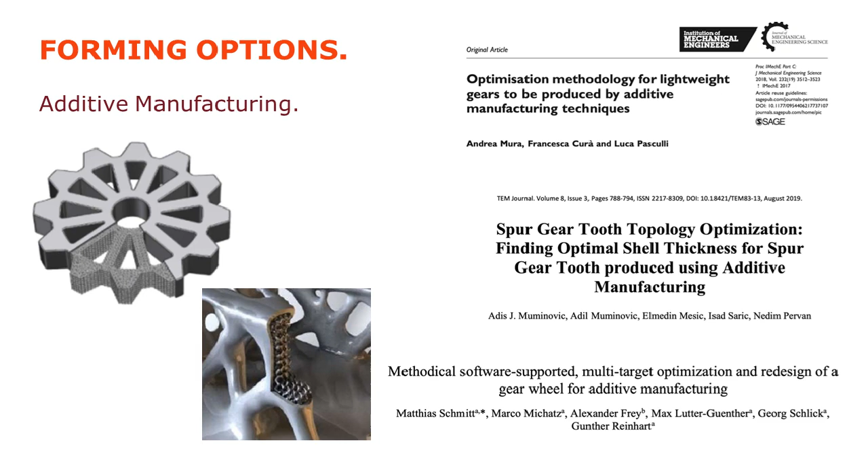So now I'm on the last 4 slides, and I apologise for rushing through these things. I want to talk a little about Industry 4. Yes, I've done all the history lessons, gone through all these things, but the amazing thing is, as we approach Industry 4, things are happening in our industry.

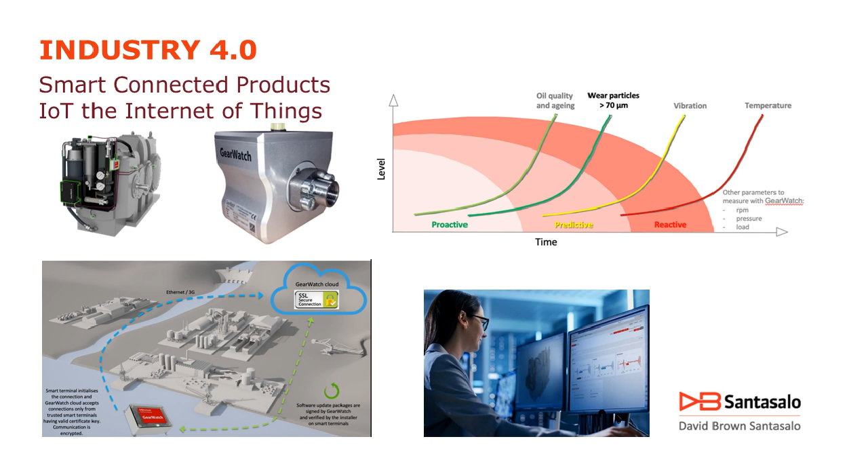First, smart connected products, the Internet of Things. We've talked about it for a few years - David Brown Santasalo have this GearWatch system. Now we can embed it onto gearboxes around the world. This is Internet of Things - it measures what's going on in the gearbox, goes to the internet, through a secure network, to the engineer who's sat there. She can monitor things. It's been going on a few years now, and it's making things change significantly.

The next item is digital twins. This is from Newcastle University, where we look at the theoretical tooth flanks. On the left of that diagram are measurements - remember, we're measuring the surfaces of gears to the level of white blood cells. The top 2 diagrams on the left show the theoretical tooth flanks, and on the right we get the theoretical flank contact stress distribution. This is what's happened at the design stage - we've worked out the theoretical tooth flanks, and we know that if we get that shape of gears, those are the contact stresses.

But what's happening in this application here, we're measuring the tooth flanks, and it's saying, well, hang on a minute, that isn't what you designed. There's some errors there, and on the right we're getting the measured contact stress distribution. So this is the design unit.

One of the Dontyne systems there is used to calculate that stress distribution. It's saying, hang on a minute, you thought you were going to get those stresses, those errors are giving you this. And that digital twin we're using is allowing us to put that knowledge into the machines doing it, saying, if you want to reduce those stresses, it's learning and remachining to get rid of that. Can't machine it too much because you get rid of all your surface hardness. So those things are going on even as we speak.

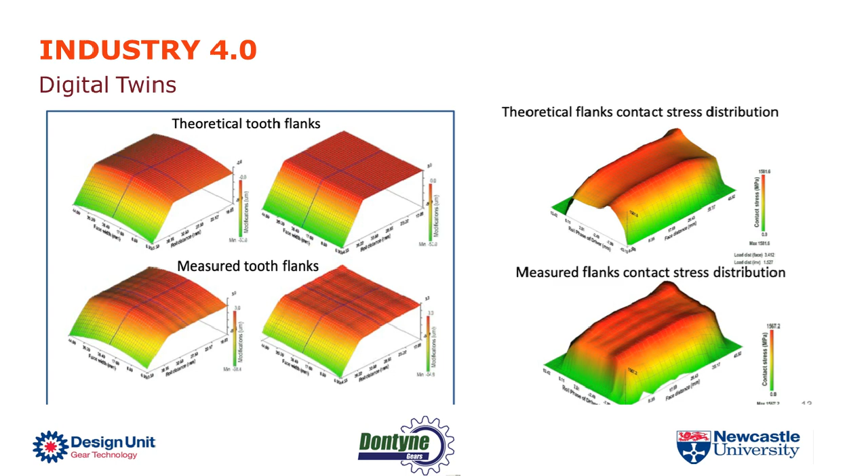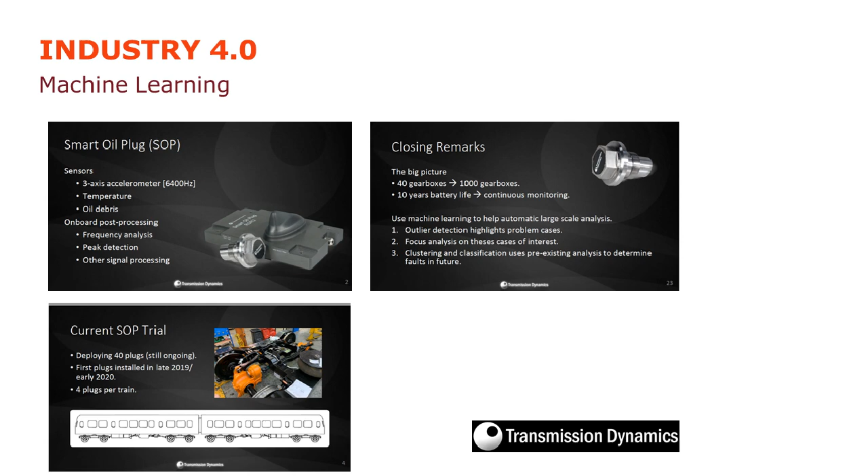As that plug sits there, without human intervention, it's learning from what's going on. It took me a long time ago to understand the Laplace transformations to solve differential equations, so I'm not even going to try to explain the neural networks happening here. But what this smart plug is doing at the moment is going through this whole fleet of rail gearboxes, measuring, and even as we speak, it's quite scary that it's learning about it.

It's like, hang on, I've got this measurement here, and I know that's a deviation from gear tooth profile. I know that's insufficient gear tip. It's picking up these things. This is a company called Transmission Dynamics working on these incredibly clever things, and I find that quite spooky. This is machine learning happening all the time. Yes, humans are involved in setting it up, but it's learning on its own, going its own merry way and finding out these things.

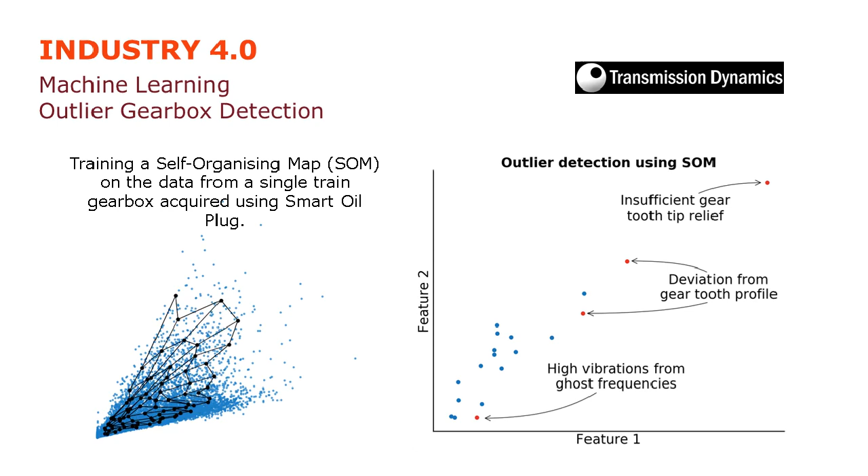So I'm going to finish up now, with a great deal of relief around the room, I understand. But what I want to go through is that I started off with the additional references, these pictures here. I started off nearly 4,500 years ago with a south pointing chariot. I've gone all the way through mechanical power transmission, how gears and mechanical power transmission work, and I finished off with the Internet of Things. I finished off with digital twins and scaled out. I've ended up with a gearbox with a plug in there that's learning all the time about what's going on.

And I actually wish I was starting my career again, because the opportunities which are coming our way are quite exciting, all those things which you've got there.